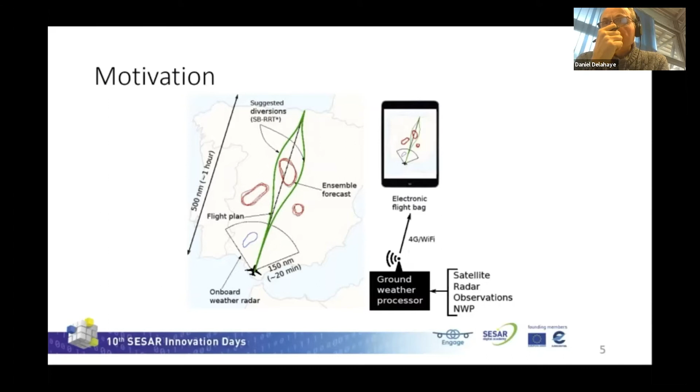Our idea is to go further. Based on this weather data, we would like to implement an algorithm that suggests different diversions, shown here in green, to go around storm cells, so that pilots and air traffic controllers can decide which path is more convenient. For that purpose, we need a methodology that is fast, and also compatible with ensemble-based weather products, which are now a trend in weather prediction.

Now let's move to the second part of the presentation, our algorithm, the scenario-based RRT star. RRT stands for Rapidly Exploring Random Tree. This kind of algorithm has been used for path planning, mainly in robotics and autonomous vehicles. It is a sampling-based, iterative methodology to connect two states, as can be observed in this picture. During each iteration, it takes a random sample from the free space and attempts to connect it to a tree. The idea is to connect the destination to the origin with a tree and its branches, called edges. If the total number of iterations is large, this algorithm is asymptotically optimal and minimizes a cost function, which for this problem would be flight distance.

We have modified it to handle uncertain and dynamic obstacles described by a finite number of scenarios, or ensemble members. Finally, with the use of GPUs and parallelization, it's able to provide solutions in seconds, or a minute or two, depending on the iteration. In this figure on the right, you can observe an example of a tree in green and how it grows, and also the solution of minimum distance in red.

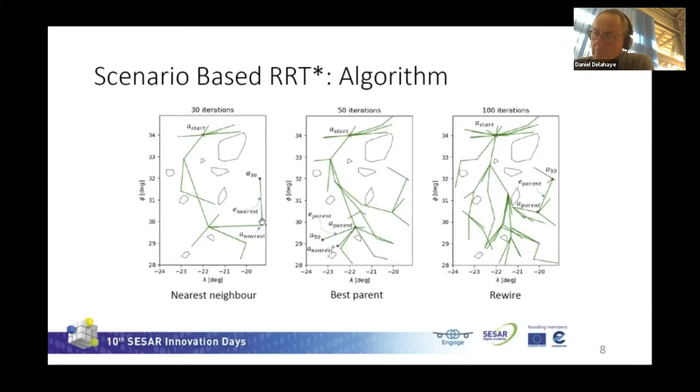There is an additional function, really time consuming, and it's the one that determines if a connection is safe. It's present in all three of these functions. Before we establish one connection, we need to check if it's safe. How safety is ensured is explained in this slide. This is also what has been parallelized due to the computational time.

The scenario-based RRT star ensures that each trajectory, formed by a sequence of tree branches or edges, is safe with a safety margin which we denote by epsilon. For each trajectory, the sum of probabilities of each edge intersecting the obstacle set or storm set must be below this safety margin, which is this equation here.

We assume that obstacles are uncertain and described by n sub sc possible scenarios. Each of these individual probabilities is calculated as the number of scenarios in which the edge is unsafe over the total number of scenarios. This number of scenarios in which the edge is unsafe is quite time consuming to obtain, because it involves calculating if there is an intersection with each cell in each scenario.

At first it was done sequentially, but the process was parallelized with GPUs, reducing substantially the computational time, as I will show later. On the right, I include an example with a trajectory of two edges and a 10% safety margin.

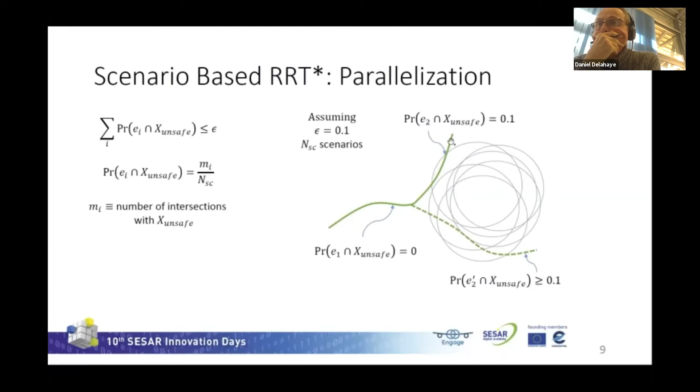So let's continue with the case study and results. The idea is to find a trajectory between these two states, which are here and here on the map, minimizing flight distance and with a safety of 90%, or an epsilon of 0.1.

We have created this artificial ensemble of 20 members to represent uncertain storm cells. They are basically polygons. We are showing a static environment, but the algorithm is tested and works with moving obstacles as well.

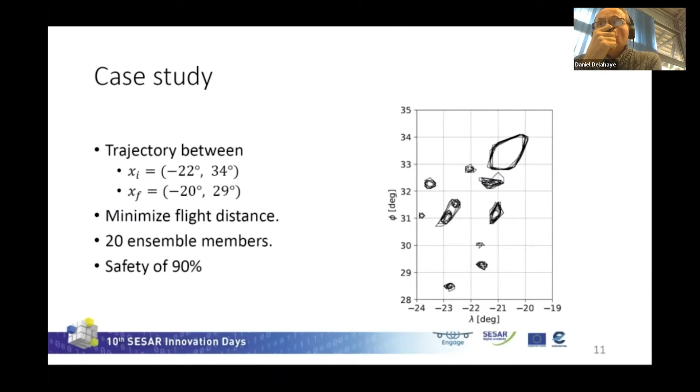So the first relevant result is how parallelization affects performance. In this table we show the time it takes to check if just one connection is safe, one edge, as a function of the number of scenarios of the members of the ensemble, which move from 5 to 50. Without GPU and parallelization, it's on the order of seconds and increases as we increase the number of scenarios, almost linearly. However, with parallelization, the time reduces to milliseconds, and it doesn't depend almost on the number of scenarios. Time was reduced by 2 or 3 orders of magnitude, as you can see here.

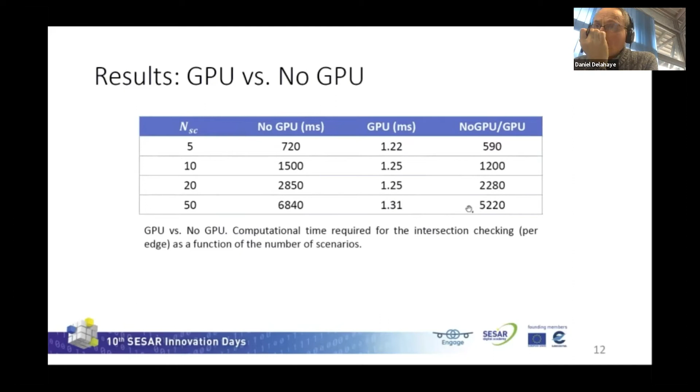Now, if we consider a whole simulation for a predefined number of iterations, from 100 to 5000, without GPU it takes hours or days, and we couldn't continue. It would take months to go through 2000 or 5000 iterations. However, with parallelization, it takes around seconds or minutes. 1000 iterations would take around 2 minutes, and as I will show later, it would be enough for this case.

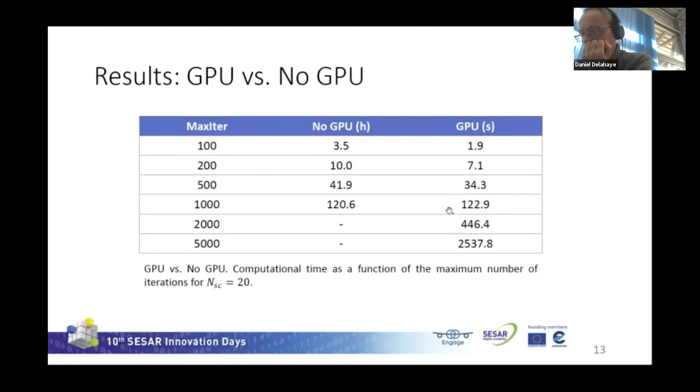In this slide, we show computational time for multiple simulations with respect to the number of iterations. They are represented in double logarithmic scale. The relation is quadratic, and doubling the iterations implies 4 times more computational time. So we should approach optimal solutions with as few iterations as we could to reduce this time.

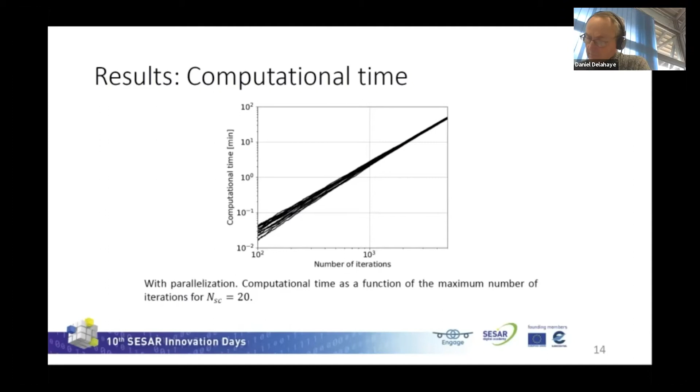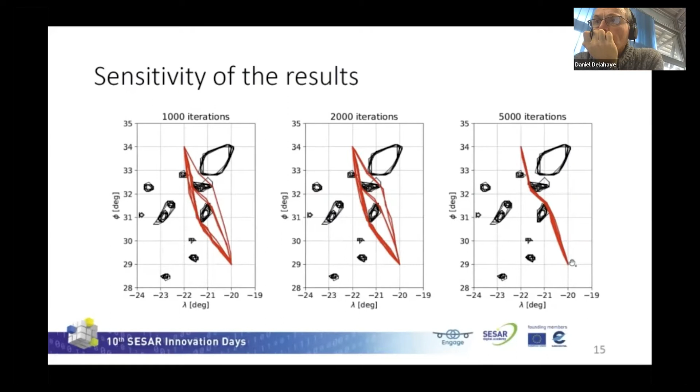However, we consider that it's not necessary to go to 5000. In this figure, we represent the error in flight distance with respect to its minimum value as a function of the number of iterations. This minimum value was obtained running the simulation for 100,000 iterations.

So here we consider 50 simulations and represent the 0, 10, 33, median, 66, 90, and 100 percentiles with different color bands. If we take a look at the median, after 500 iterations, the error was 2.4%, and after 1000, only 1.1%.

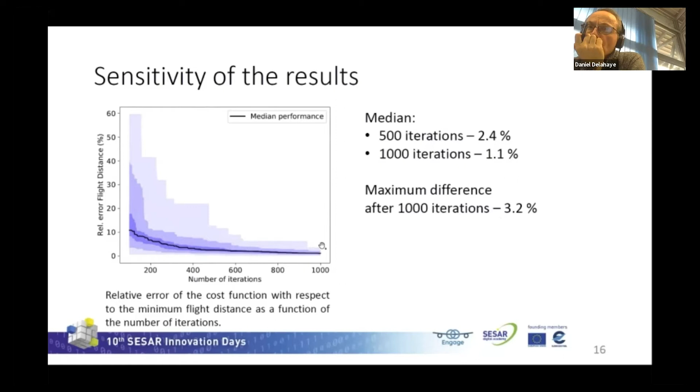After 1000 iterations, the maximum difference was 3.2%, and 90% of the simulations were below 2%.

Finally, some conclusions and future work. The parallelized scenario-based RRT star is able to produce safe solutions in a matter of seconds or minutes with a safety margin which is user-defined.

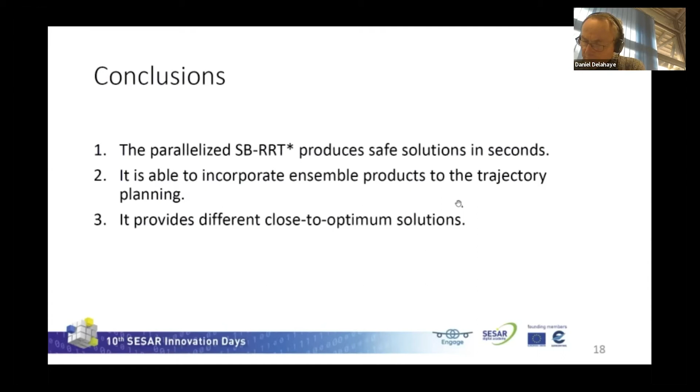It is also able to incorporate ensemble-based weather products to the planning, and additionally is able to provide different close to optimal solutions, which can be positive, as we will be able to give pilots and air traffic controllers more than one safety path around storms. As future work, we would like to extend to 3D problems and include more realistic weather data.

Also, one thing we are doing is improving convergence, as illustrated here on the right. The first picture shows the algorithm growing in each direction, minimizing paths towards every state, which is not really efficient.

We are studying the use of informed trees, shown here on the right picture. They focus the search on the area of interest and make better use of each iteration. That means the algorithm is able to converge earlier.

So if instead of 1,000 iterations, we are able to approach the solution in 500, requiring 4 times less computational time. That would be 30 seconds instead of 2 minutes.

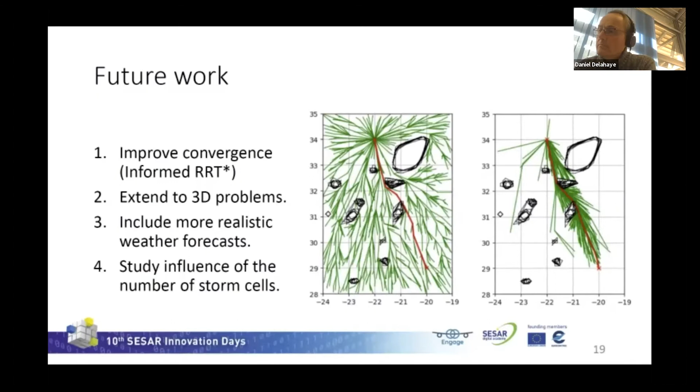Finally, we would like to explore how the number of obstacles or storm cells and the separation between them affect the performance and convergence of the algorithm. And that would be all. Thank you for your attention, and I will be pleased to answer any questions you may have.

Thank you, Eduardo, for this presentation. It was clear. Are there some questions? I see one question in. I will read the question. Perhaps it is easier. From Antonio Franco.

Your work is interesting. How have you compared your algorithm with trajectory planning methods based on visibility graph?

Thank you for your question. I did some research on that kind of graph, but I haven't compared it yet. It would be an interesting approach for the future, but at the moment we have not compared it yet.

So thank you. Are there just to see if there are some other? Right, not so good with this tool. Yes, it is the same. Are there some other questions? Feel free to ask a question to Eduardo.

So me, I have some questions for you. Because I work with the same approach for emergency trajectory design. But so in 4D, when you take into account the time dimension in your algorithm, yes, you can avoid moving obstacles. But what about the speed of the aircraft?

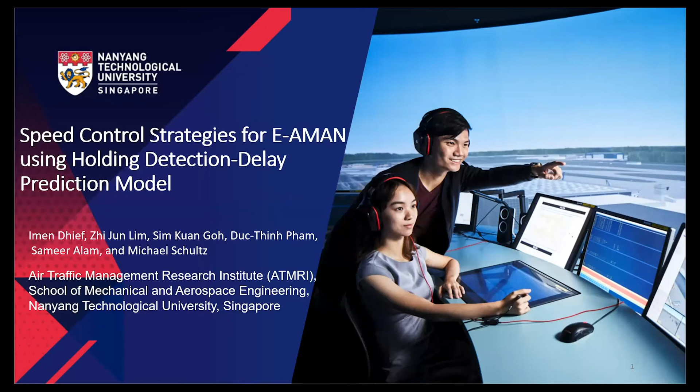Hello, everyone. So my talk today is about a speed control strategy for Extended-AMAN using holding detection and delay prediction model. During this presentation, I will go through this plan. First, I will introduce our problem. Then I will present our proposed approach, which includes two sections.

The first one is a holding and delay prediction model, and the second one is a speed strategy to absorb approach phase delay. Then I will present some of our experimental results, and finally I will conclude with some conclusions and perspectives.

So I will move to the introduction. The growth in air traffic demands put significant pressure on busy airports to optimize their resources and look for cost-efficient solutions, especially regarding the post-COVID pandemic. Currently, most airports are operating at their maximum throughput, especially at peak hours, which causes an increase in flight delays, particularly in the TMA airspace.

These delays are expressed in terms of holding and route extension assigned to the flight by the controllers. These maneuvers cause side effects like TMA congestion, increased fuel consumption, and environmental impacts. In order to manage this problem of holding at lower altitude, the Extended-AMAN was introduced.

The Extended-AMAN is an upgrade of the current arrival manager system, established to provide the optimal arrival sequence. The main difference between AMAN and Extended-AMAN is that the AMAN system operates within 150 nautical miles from touchdown, while Extended-AMAN extends the coverage horizon up to 500 nautical miles.

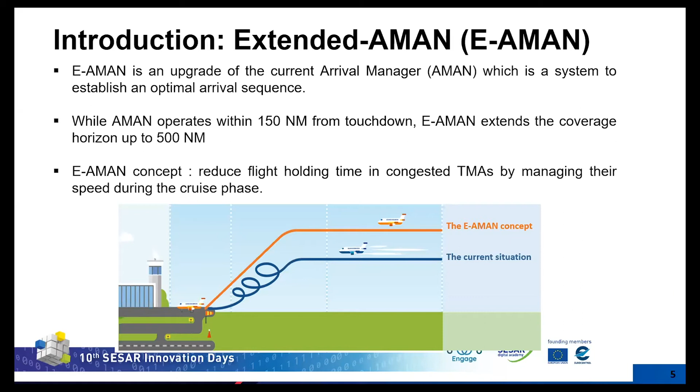The main concept of Extended-AMAN is to slow down the aircraft speed in order to absorb the holding time at the cruise phase, which we can see in the figure. The current situation is shown in the blue line, where the aircraft experiences holding in the approach phase. However, with the Extended-AMAN concept shown in the orange line, the aircraft slows down its speed at the cruise phase, so that the approach phase is clear of any extension and holdings.

The Extended-AMAN is already implemented in several cities in the world, like Rome, Amsterdam, and London, and it demonstrates success in ensuring smooth and efficient TMA traffic. Validation trials prove reduction in aircraft fuel consumption by an average of 8% per flight, and in airborne waiting time up to 90%.

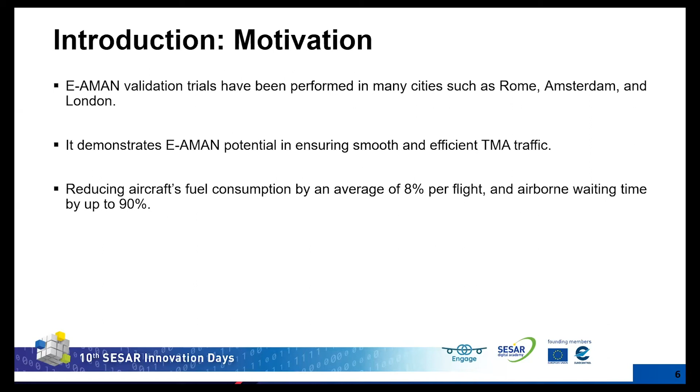Despite the increased benefits expected from the implementation of Extended-AMAN, accurate prediction of the arrival flight time and delays remains very challenging, because the flight trajectory in the TMA presents complex holdings and trajectory extension due to vectoring by the controllers.

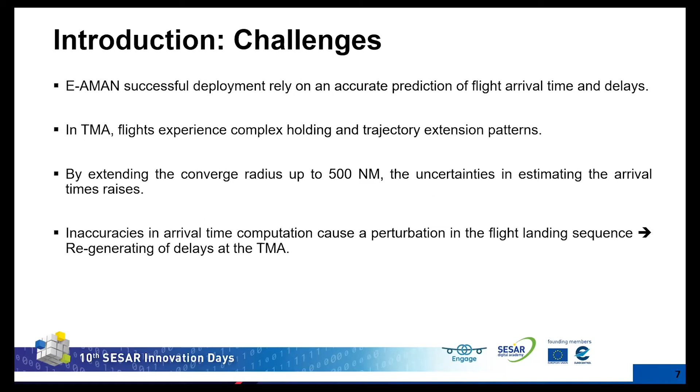So, that's why... sorry, excuse me. Oh, sorry. Yeah, sorry, excuse me.

So in this work, we propose a methodological approach for transferring the flight delays and holdings from the approach phase to the cruise phase. Our proposed approach includes both data-driven and optimization techniques.

We first propose a method to detect the holding pattern from historical trajectory data. Then we propose a prediction model to predict the holdings and delays at 200 nautical miles from the airports. After that, we propose an optimization model that takes the predicted delay as an input and provides the airline and the ANSPs with adequate speed adjustment.

So we can see here the concept diagram of our proposed approach. We have first the delay prediction model, then we adjust the aircraft speed at 200 nautical miles, which results in absorbing the delay at the cruise phase, and the approach phase is now clear of the holding and vectoring.

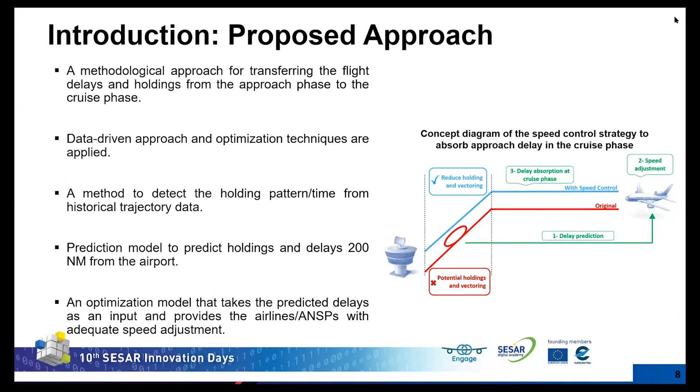So now I will start with our first section, which is holding and delay prediction framework.

In this work, we use one month of arrival flights to Changi Airport. The data we have is ADS-B data for all the arrival flights, and also we have flight plan data provided by a major airline in Southeast Asia. We also use the meteorological data, METAR. So the flow chart is presented in the figure here.

We can see three main boxes. The first one is the data mining model, which includes the cleaning of the data, the holding detection model, and the feature engineering model. Then we have the second block, which is the holding time prediction model, which includes two models, the classification model and the regression model. The third box is the delay prediction model, which also includes two submodels, the classification model and the delay prediction model. The prediction model is performed at 200 nautical miles from the airport.

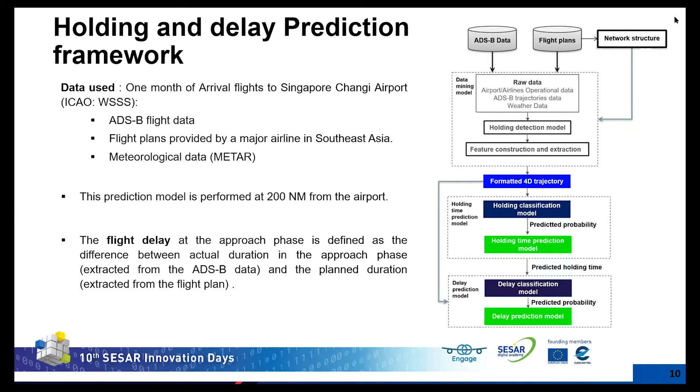Let me define the flight delay in our model. Actually, the flight delay at the approach phase is defined as the difference between actual duration in the approach phase, which is extracted from the ADS-B data, and the planned duration, which is extracted from the flight plan. The duration in the approach phase is computed by the time from the initial approach phase to the touchdown.

I will start here by presenting our algorithm for the holding detection. You can see at the left-hand side an example of a flight holding pattern presented by the flight trajectory in the dotted blue line. The solid blue line presents the segment of the flight path.

First, we use a Kalman filter to estimate the flight velocity component at each trajectory point. Then this velocity component is projected onto the flight path, which results in the graph on the right-hand side, the variation of the speed component relative to the time. After that, the holding is detected if the velocity vector includes a sequence of negative values.

Once we detect the holding, the time of holding is derived by computing the first turnaround time, given by TA, and the second turnaround time, given by TB. These two times, TA and TB, can be derived from the zero crossing in the projected speed profile. Then the holding time is equal to twice TB minus TA.

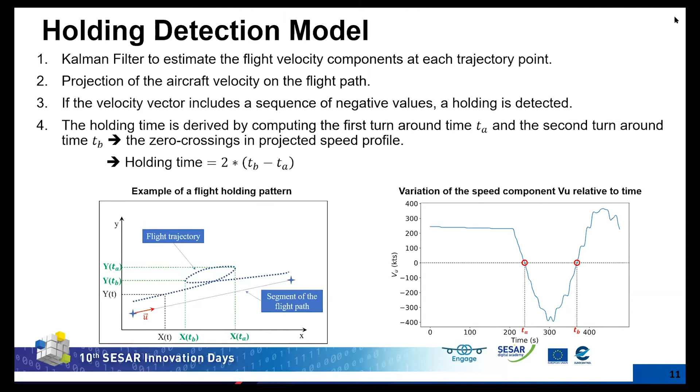So now I will move to the prediction model. The first section is the feature engineering. Here we consider all the features included in our model.

The first one is the flight information, which includes the region, the departure airport, the wake category. Then we have the flight parameters at 200 nautical miles, which include the latitude, longitude, heading, altitude, and speed, as well as hour of the day and day of the week. We use also flight path, like airways, stars, and runway. We use the surrounding traffic, and also the weather from the METAR, which we translate to the ATMAP weather index. We use as well airport performance metrics like arrival and departure runway capacity.

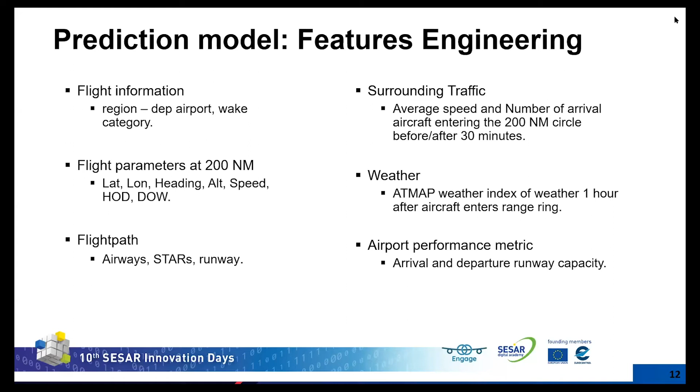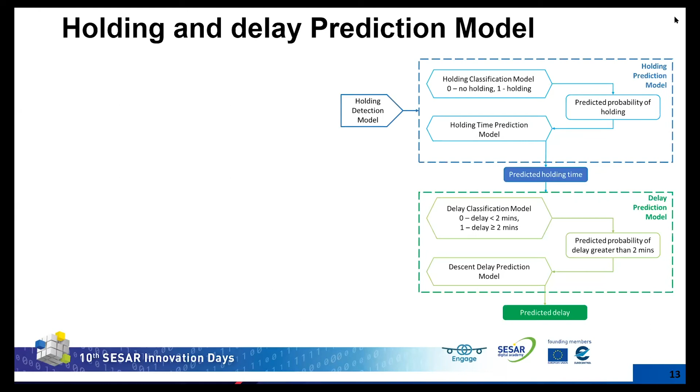So these features are included in the holding and delay prediction model. Here we can see the flow chart for our model. The first block is the holding prediction model, and the second one is the delay prediction model. The holding prediction model includes a sub-process, the classification model, which predicts whether the aircraft will go on holding or not.

The result of this classification model is the probability of holding. This probability is an input for the holding time prediction model, which is a regression model and predicts the total holding time for the aircraft at the approach phase. The result of this first model is the predicted holding time, which is used as an input feature for the delay prediction model.

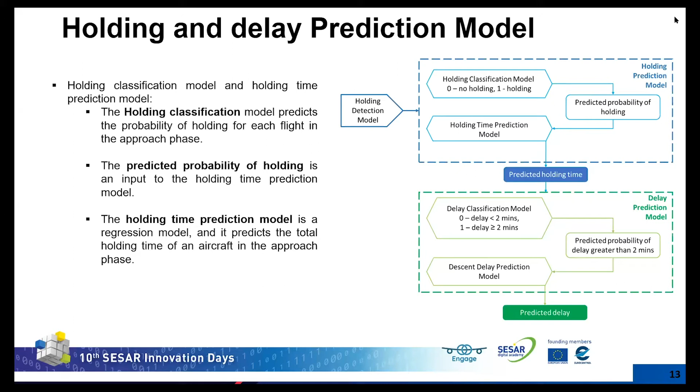Now the delay prediction model also includes two processes. The first is classification, whether the aircraft will be delayed more than 2 minutes or not. The result of the classification model is the predicted probability. This probability is included in the approach delay prediction model as a feature. The delay prediction model is a regression model, which predicts the total delay of an aircraft in the approach phase when the aircraft is at 200 nautical miles. The result of this model is the predicted delay.

Once we have the predicted delay for all the aircraft at 200 nautical miles, we move to the speed strategy to absorb this predicted delay at the cruise phase. The speed strategy to absorb approach phase delay aims at slowing down the aircraft speed in order to transfer delay from approach phase to the cruise phase.

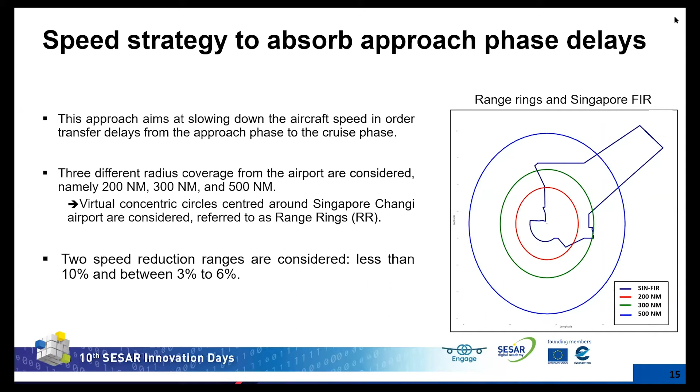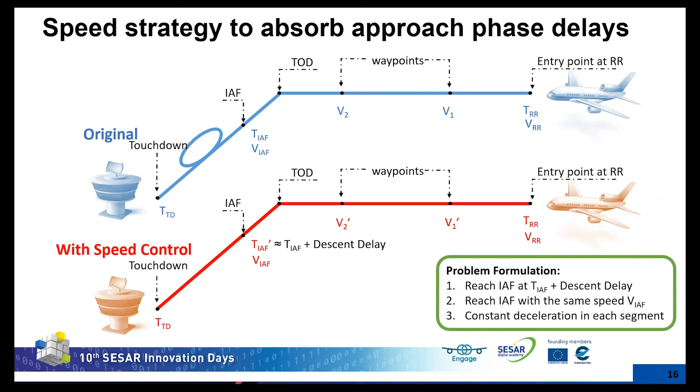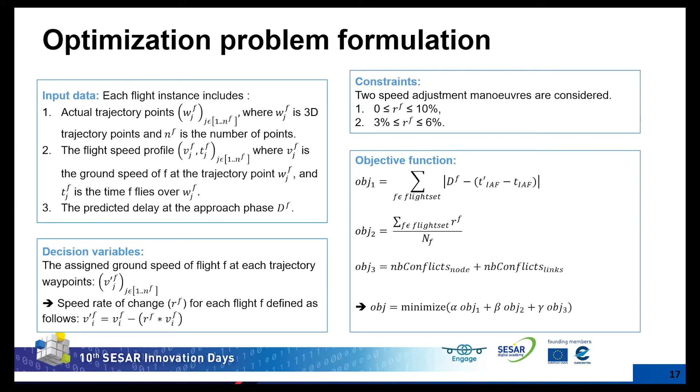Our constraints consider two speed adjustment maneuvers: the first is a rate of change less than 10%, and the second is a rate of change between 3 and 6%. The objective function considers three objectives: first, the aircraft should absorb the predicted delay before reaching the initial approach fix; second, reduce the rate of change for all aircraft; and third, reduce the number of regenerated conflicts at node and link. The objective function minimizes the weighted sum of these three objectives.

Now I will move to some experimental results. In this work, we consider the arrival flights to Changi Airport for the month of May 2019. We have ADS-B data for all the arrival flights, and we have flight plans provided by one airline.

The initial number of flights is 13,430. The number of flights after data cleaning is 9,376. The number of flights with flight plan is 2,091, and the number of flights with holding is 679. The number of flights with both flight plan and holding is 163.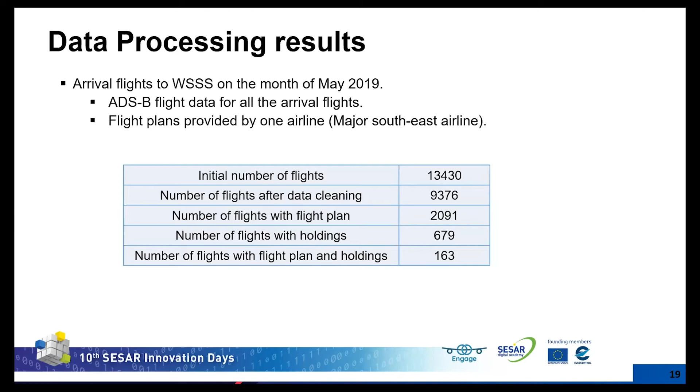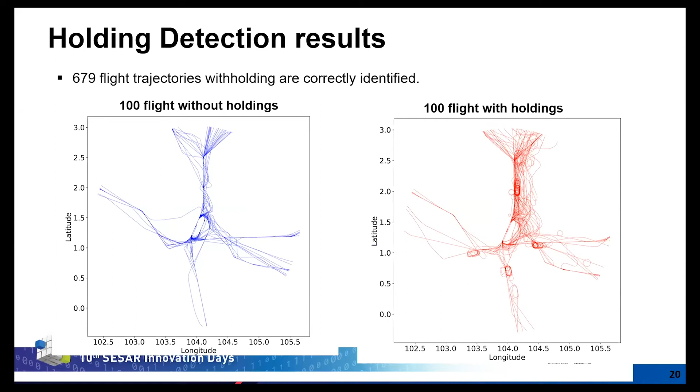Now I will present the holding and delay prediction results. For the prediction model, the data is split into 80% training and 20% test. Threefold cross-validation is performed to determine the optimal parameters for each prediction model.

This figure presents the star routes for the arrival flights to Changi Airport. In our model, the flight trajectories are categorized into 4 star groups, and each group has its own prediction model. Star group 1 is for flights approaching Singapore from the north. Star group 2 is for flights approaching from the west. Star group 3 is flights arriving from the south, and star group 4 is flights arriving from the east.

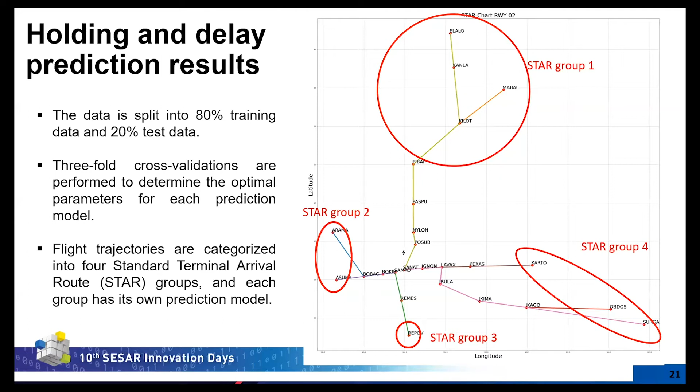So this is the holding prediction results. The classification accuracy is 92.9. And the holding time prediction is presented in this table.

So for each star group, we have the number of flights and the mean and standard deviation of the holding time. We have the results without using the holding probability in red, and the results when using the holding probability in green.

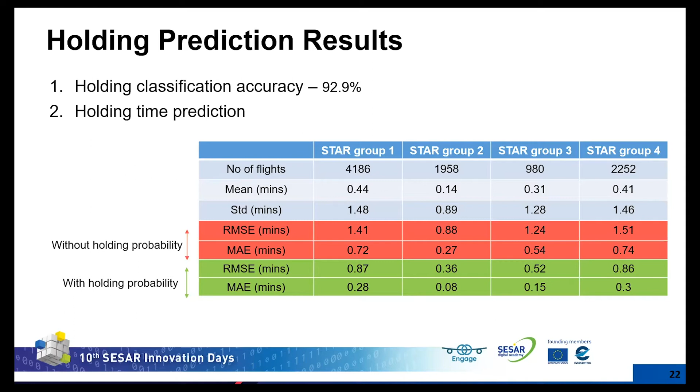We can see that when using the holding probability, the root mean square error is strongly reduced, to less than 1 minute. However, without the holding probability, the root mean square error is almost equal to the standard deviation.

Now I will present the result for the delay prediction. Here we have the delay classification accuracy of 69.5. Even though the classification accuracy is not very high, we are more interested in the prediction accuracy of the regression model, as this classification model provides only an input for the delay prediction.

The delay prediction results are presented in this table. Here we have fewer flights because we only consider flights with flight plan, where we can compute the delay. The results without using the delay probability and predicted holding time are in red, and the results using the delay probability and predicted holding time are in green.

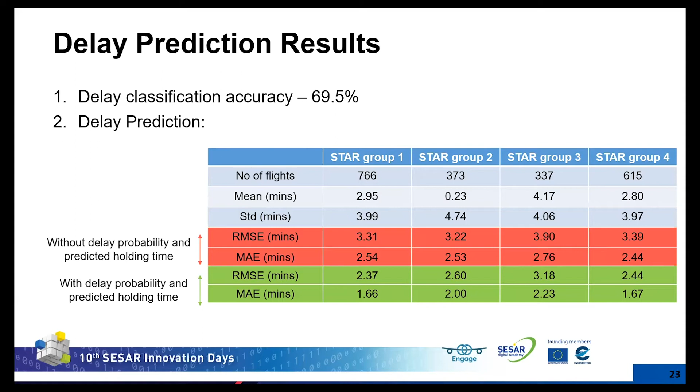We can see that the prediction performance improves across all the star groups when including the delay probability and the predicted holding time. Now I will move to the speed control strategy.

Here we consider a scenario with 3 days of traffic. The number of flights is 762, and among these flights we have 80 flights with delay. The total amount of delay is around 8.5 hours.

Here we consider two speed strategies. The first one is speed adjustment by less than 10%, and the second one is speed adjustment between 3 to 6%. The histogram here shows the absorbed and remaining delay within different range rings and different speed strategies.

At range ring 200 nautical miles, the amount of delay transferred to the cruise phase is around 18 to 20%. At range ring 300 nautical miles, the delay transfer to the cruise phase is from 20 to 30%. And we have more interesting results from range ring 500 nautical miles, where we are able to transfer 40 to 70% of the delay.

The delay statistics for different speed control strategies are presented in the table below. The mean initial delay is around 6.4 minutes per flight. When applying the speed strategy, the mean absorbed delay can reach 4.3 minutes for the range ring 500 nautical miles, equivalent to a mean remaining delay of 2 minutes per flight.

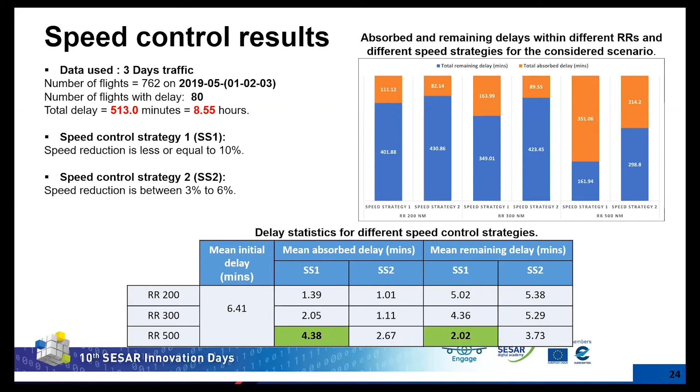These are the results for a scenario including 500 flights delayed by more than 2 minutes. The initial total delay is around 50 hours, and we apply here speed strategy one.

This figure shows the percentage of absorbed delay in each star group. We can see at least 60% of delays are absorbed at the cruise phase when applying speed strategy one with the range ring at 500 nautical miles, which is equal to almost 30 hours.

For example, in star group 3, we have 85% of the delay transferred to the cruise phase when starting to apply the Extended-AMAN at 500 nautical miles.

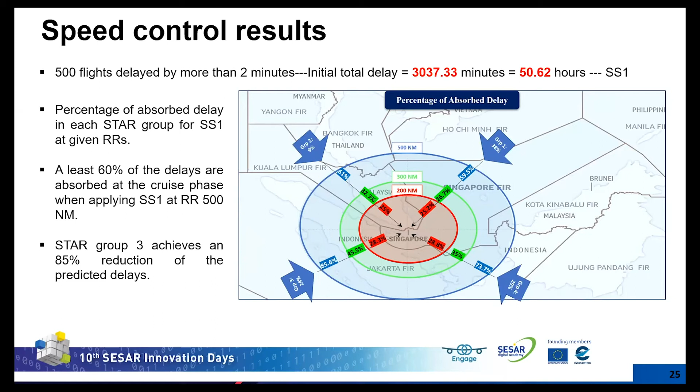Now I'll pass to the conclusions. In this work, we propose a method to transfer flight delays from the approach phase to the cruise phase. Here we have three main contributions.

The first is a new holding detection algorithm to detect flight holdings and holding time from historical data. Then we propose a data-driven model that combines classification and regression models to predict the flight holding, the holding time, and the flight delay at 200 nautical miles from the airport.

Then we propose a speed strategy to absorb the predicted delay at the cruise phase. The computational experiments are conducted using 1 month of air traffic arrival flights to Changi Airport.

The main important observation here is that predicting flight delays is strongly correlated with the prediction of holding pattern and duration. The second is that applying speed control at 500 nautical miles contributes to transferring up to 85% of the delay to the cruise phase, which helps reduce the workload of TMA controllers and also reduce fuel consumption caused by holding at lower altitude.

In future work, we propose to investigate the holding and delay prediction model at 300 and 500 nautical miles. We also propose to investigate a dynamic speed adjustment, which better manages the delay prediction error and uncertainties.

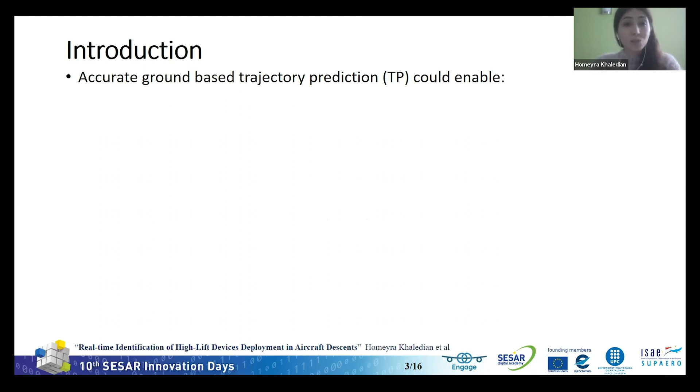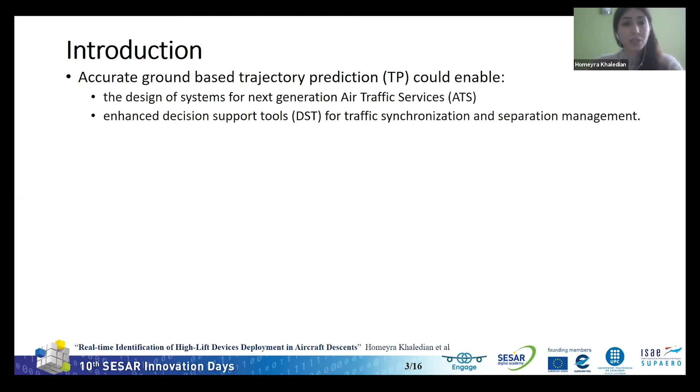Having an accurate ground-based trajectory prediction is extremely important to design the next generation of air traffic services, since the new generation of air traffic management is based on the trajectory-centric paradigm, or trajectory-based operation. It also helps enhance decision support tools for traffic synchronization and separation management, for instance in arrival or departure managers, allowing more efficient arrival or departure arrangement.

It also enhances safety nets and collision avoidance tools such as medium-term conflict detection, either in an automated environment, on-ground, airborne, or in distributed systems.

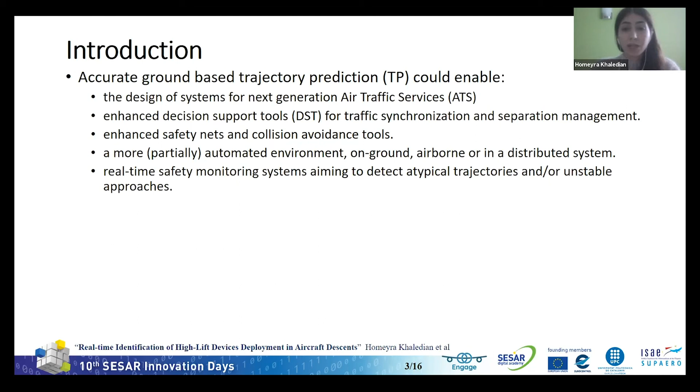More importantly, to develop a real-time ground-based monitoring system that would be able to detect atypical trajectory or unstabilized approaches. We say that an approach is stabilized if all the following criteria are met when the aircraft is at a given height above the runway threshold, which typically is around 1,000 feet.

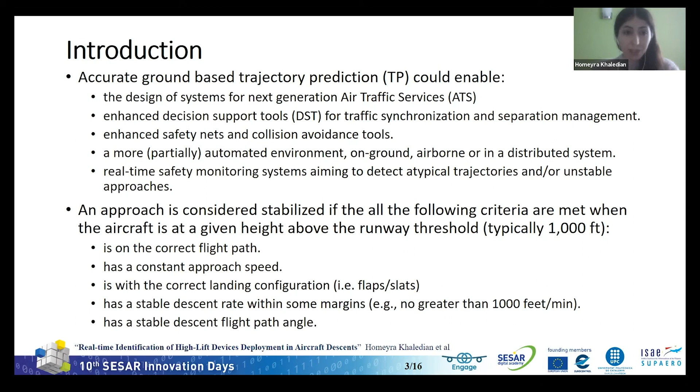When the aircraft is on the correct flight path and has a constant approach speed, with the correct landing configuration, which could be flaps and slats, and has a stable descent rate within some margins, for example not exceeding 1,000 feet per minute, and has a stable descent flight path angle.

So what's the objective of our paper? Here we are dealing with real-time identification of high-lift devices deployment based on surveillance input data, which means our measurements are from radar or ADS-B. We expect that this estimation aims to enhance ground-based trajectory predictions and aims at detecting atypical trajectories or preventing unstabilized approaches. Here in this figure, you see the flaps and slats which are deployed on the wing of the aircraft.

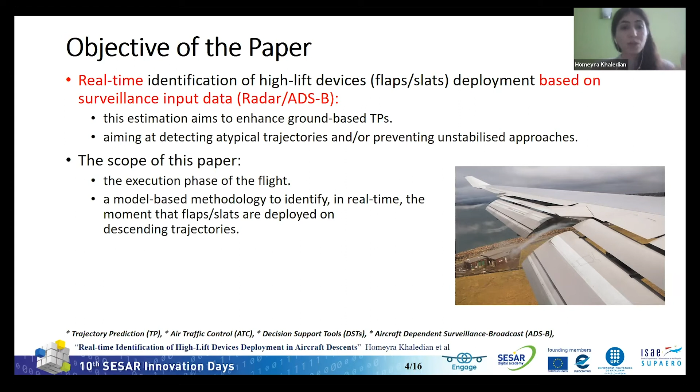So what's the scope of this paper? Actually, we are working on the execution phase of the flight, and we are taking into account a model-based methodology to identify in real time the moment that flaps and slats are deployed on descending trajectories, since we are focusing on the aircraft descent. We're going to detect the deployment moment of the first flap configuration, which we expect our work would be capable of being implemented in real-time applications.

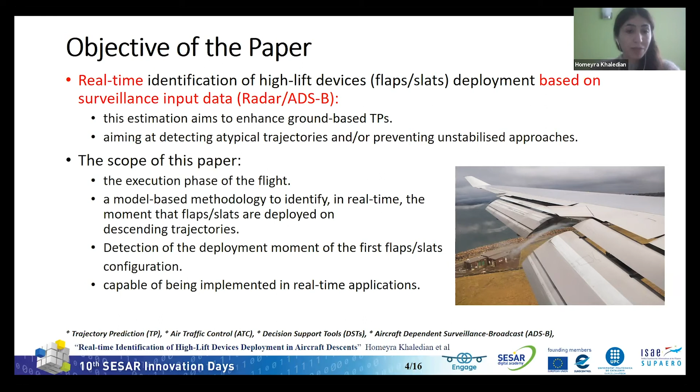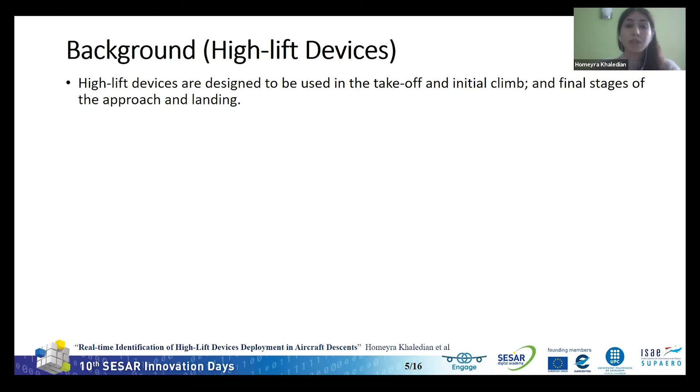So what are the high-lift devices? Actually, as you all know, the wings of the aircraft are equipped with high-lift devices to allow the aircraft to fly at a lower speed and consequently reduce the landing and takeoff distances. So those devices are designed to be used in the takeoff and initial climb and final stage of the approach and landing. Commercial airlines usually have aircraft equipped with flaps and slats.

So in this work, for high-lift devices, we are considering flaps and slats as our high-lift devices, which have different positions or configurations, depending on the circumstances of the flight and also depending on the type of the aircraft. Those are progressively deployed during the approach and progressively retracted during the climb.

We have two main categories of these flight circumstances: clean configuration, which means all the flaps and slats are retracted during the flight, so there are no flaps and slats deployed, or, depending on the type of the aircraft, we have different positions. For instance, in the Airbus A320, we have 5 different configuration settings, including Conf 1, Conf 1F, Conf 2, Conf 3, and full configuration setting.

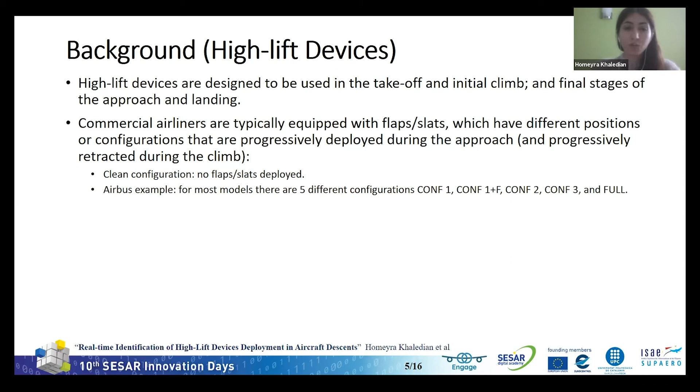Each flap and slat configuration has a minimum and maximum speed. It means that the pilot needs to deploy or retract the flaps and slats at a determined speed. And there are different drag coefficient parameters, since the flaps increase the drag forces, so at each different position we have different drag coefficient parameters.

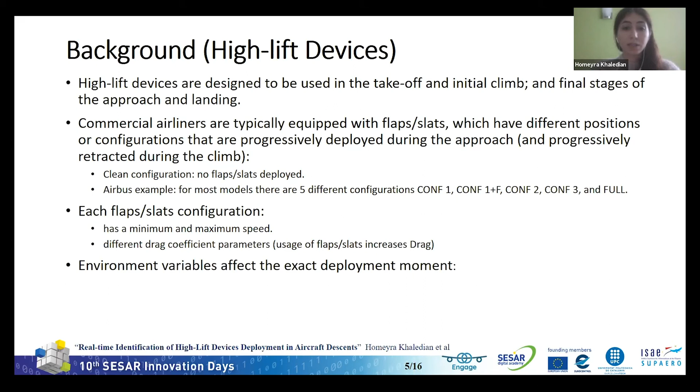Other things that could influence the deployment moment and make it hard to detect the exact deployment moment are weather, especially strong wind or gusting wind, and obstacles which are below the flight path, or how busy the crew is performing other tasks—for example, communicating with air traffic control or other things, since deploying or retracting the flaps and slats is done quite manually.

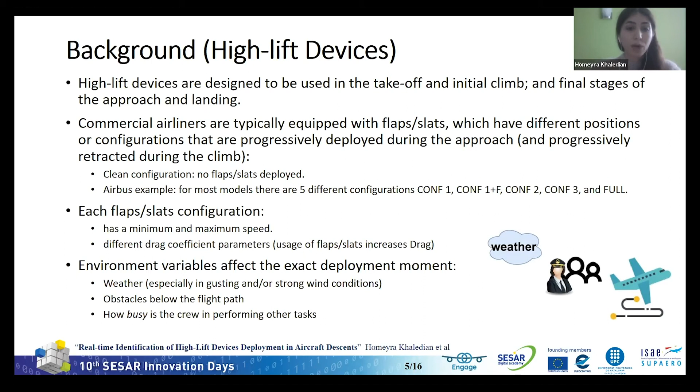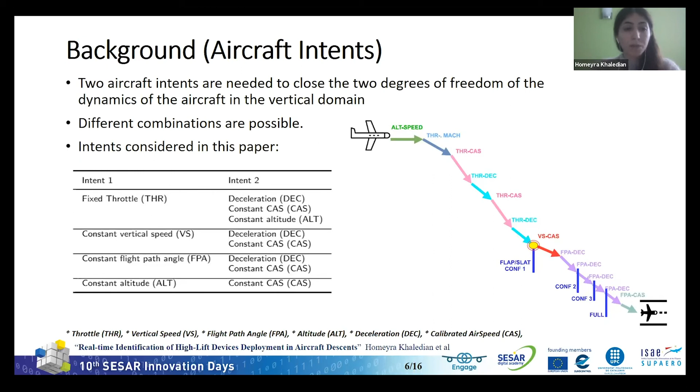For instance, flying with fixed throttle and deceleration, or fixed throttle and constant calibrated airspeed. Here in this figure, I'm showing you the typical descent from cruise to the runway, taking into account that we are flying in cruise with constant altitude and constant speed. Each color in this typical descent shows a different kind of aircraft intent, which is a combination of these 2 intents, and the vertical blue lines show the configuration setting, the starting time of the configuration setting. The yellow point shows the first moment that the pilot decides to deploy the flap, which is Conf 1. We want to actually estimate this yellow point.

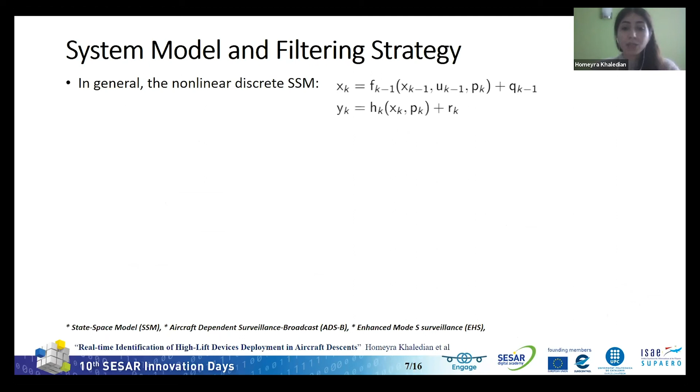Regarding the system model and filtering strategy, in general the nonlinear discrete state space model is defined based on these 2 equations, in which F and H are process and measurement functions. X is the state vector, and the initialization of the system comes from the flight and weather data. The measurement vector Y is coming from ADS-B and Mode S.

And the control vector, actually U in these equations, is a control vector which has 2 parameters: throttle and thrust and flight path angle. Since we don't have direct access to thrust and flight path angle, and the aircraft is directed by the pilot or autopilot, we define the pilot or autopilot input parameters in this P vector.

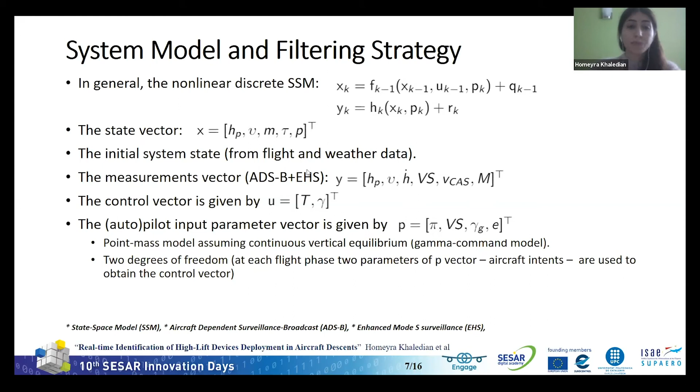And at each, as we said, since we consider a point mass model assuming a continuous vertical equilibrium, at each time step we consider 2 of these parameters to actually obtain this control vector.

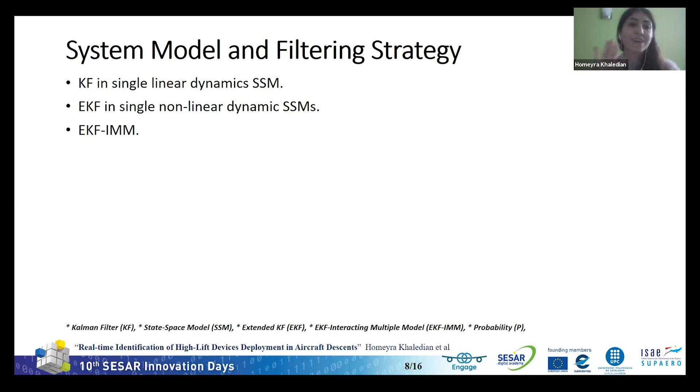Regarding the methodology, we know that the Kalman filter in a single linear dynamic state space model is optimal. If the system is nonlinear, in single nonlinear dynamic state space models, the extended Kalman filter, or EKF, is the optimal solution. But since in our work we are facing different aircraft intents at the same time, we are using interacting multiple model, and since the system is nonlinear, we are using the extended Kalman filter interacting multiple model.

So what is interacting multiple model, this IMM? Actually, the IMM is divided into 3 steps. At the first step, what's the input? The input are estimated expected value and covariance of state vectors for all the different modes we could have, and their own probabilities.

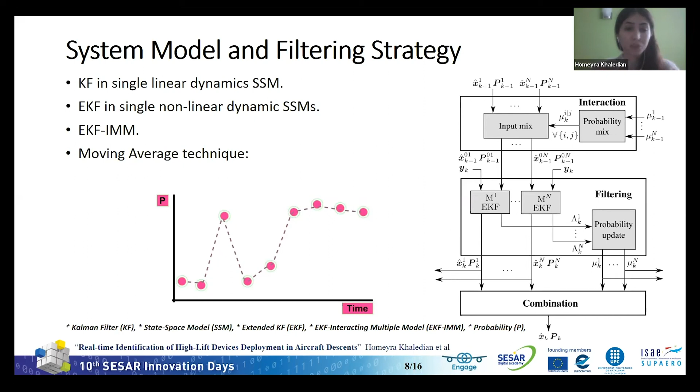And that's obvious, by having this delay in our work we are reducing the performance, but this is a trade-off between increasing the robustness and reducing the performance. In this slide, I'm showing you the whole story of our paper with this figure.

First, the trajectory simulator performs as a validation trajectory and input data. Then by passing through the Monte Carlo simulator and adding white Gaussian noise, we create the ADSB Mode S emulator. And then by applying the IMM algorithm and moving average over probabilities, we will find the maximum probability and consequently the estimated deployment moment of flap configuration.

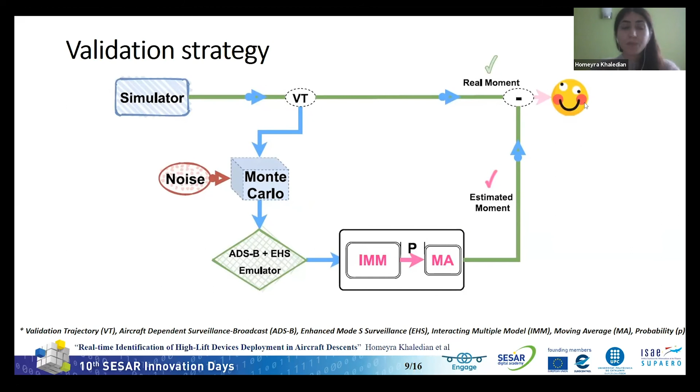And then we have the estimated moment, and we want to compare this estimated moment with the real moment that the pilot deployed the flaps, and then we will see the performance of the algorithm.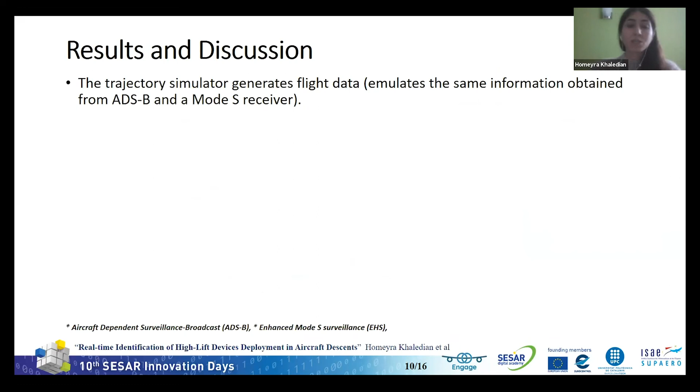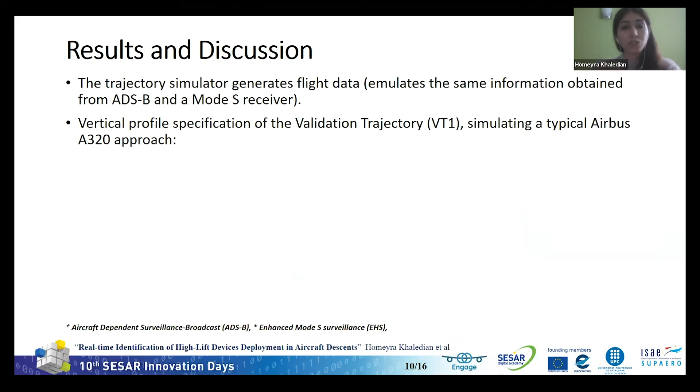Regarding the results, the trajectory simulator generates flight data based on ADSB and Mode S receivers. And since we are in the vertical domain, we created 8 different validation trajectories, actually vertical profiles. Here you see the first validation trajectory just as an example.

In this figure, you see the validation trajectory. The blue one shows the altitude, the orange one is calibrated airspeed, and the red one is true airspeed. And this validation trajectory contains 8 different phases.

And at each phase, we define the aircraft intent by combining the possible intents, and we have the end conditions. In this figure, the vertical pink lines show the first time of each phase, the starting time of each phase.

And then we have the configuration setting, what's the type of configuration and what is the landing gear position. And the yellow line, the vertical yellow line and the horizontal yellow line, shows the exact moment that the pilot decides to deploy the flap for the first time.

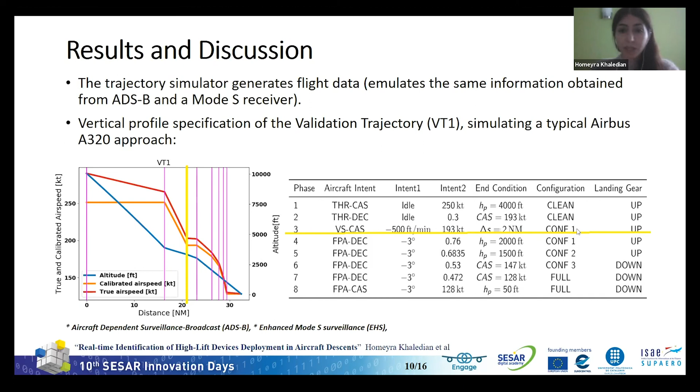So we are going to estimate this vertical time, this actual transition time from clean configuration to conf1. And here you see the results. On top of the figure, we have the real mode.

Each color shows the different aircraft intents. For example, this dark blue shows flying with fixed throttle and deceleration with clean configuration.

In this real mode, I'm showing you only two modes at the vicinity of the true deployment time. We have the deployment moment, and this vertical line is the true deployment moment.

Below, we have the estimated output of the IMM and moving average as our output, which shows the estimated model probability.

What does it mean? Imagine that at this time step, the probability of this model flying with fixed throttle and deceleration in clean configuration is around 40%. And flying with this aircraft intent, vertical speed and deceleration in clean configuration, is around 20%, and so on.

This vertical dashed line is our output, the estimated moment of flap deployment. Here we see that there is a little bit of delay between the true one and the estimated one.

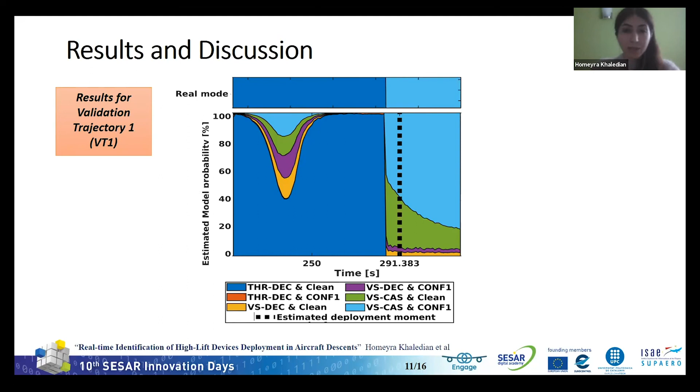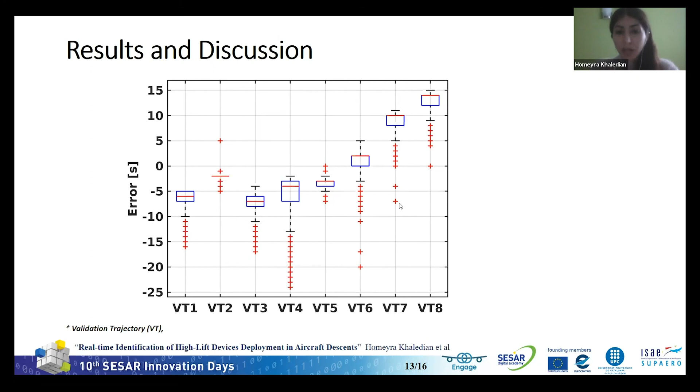The red points show the outliers for each validation trajectory. So I'm going to summarize the presentation.

In this presentation, we use the IMM filter to have a real-time identification of flap deployment moment in aircraft descent using surveillance input data.

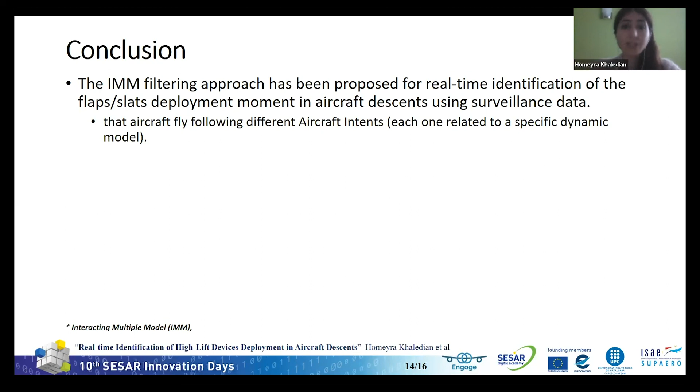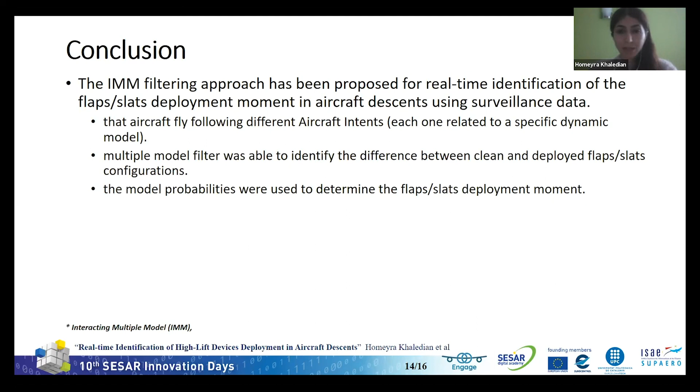Setting. The model probabilities were used to determine the flap or slats deployment moment, and we applied moving average to avoid false alarms of the proposed method.

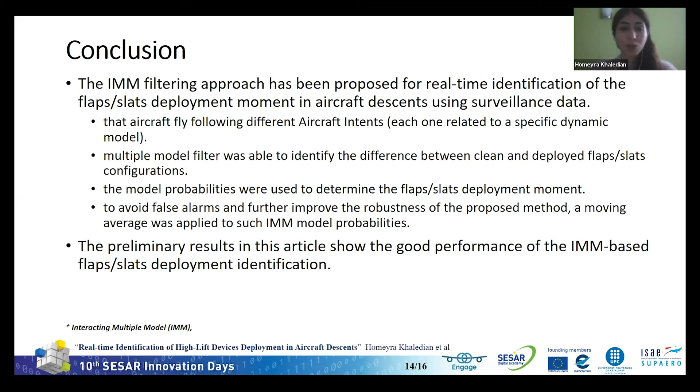The preliminary results in this article show a good performance of the IMM-based flaps and slats deployment identification.

Regarding future works, we are planning to use historical data gathered from ADS-B receivers to assess the method proposed in this paper, and extend identification between other configuration settings, since in this paper we were focusing on the first flap configuration, but in the future we're going to find other kinds of configurations like conf2, full configuration, and also landing gear position.

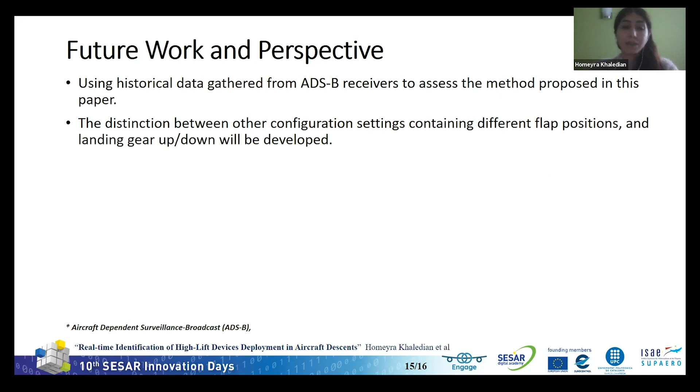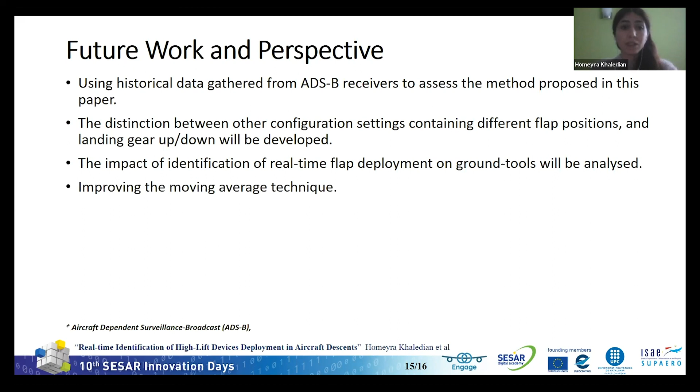The impact of real-time flap deployment identification on ground tools will be analyzed, and we're going to improve the moving average algorithm. Atypical trajectories will be taken into account to validate the proposed method, and at the end, other types of aircraft will be considered.

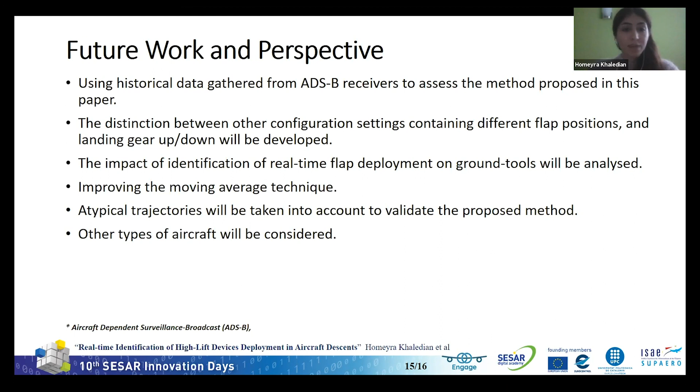Thank you very much for your attention.

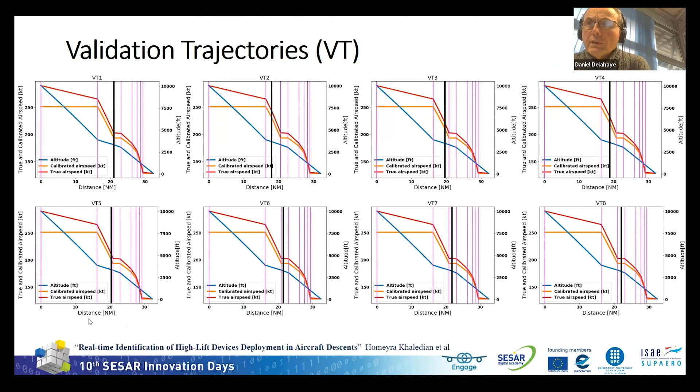Thank you for the presentation. This reminds me of some good memories when I did radar tracking. So, are there some questions from the attendees?

Yes, just have a look, because we... feel free, perhaps people will have some other questions after mine. So if I understand you correctly, in the IMM filter, you have a different linear model usually, or when I worked on that, it was linear, but you consider one model for each configuration option?

One model? No, actually, we consider different models with different configurations. Yes, but for one option of the IMM filter, it is one possible configuration, something like that, or not?

One possible configuration. Excuse me, would you repeat a little bit? Sorry, but I want to say, in the IMM, you control and estimate several models in parallel, and you do the fusion with probability fusion.

Yes. And in your case, what are the inputs? What are the models? Are there regular Kalman, extended Kalman? I don't know, inside the IMM you mean? Right. Yes, inside the IMM, since we have a non-linear system, we are using the extended version of Kalman filter, so EKF.